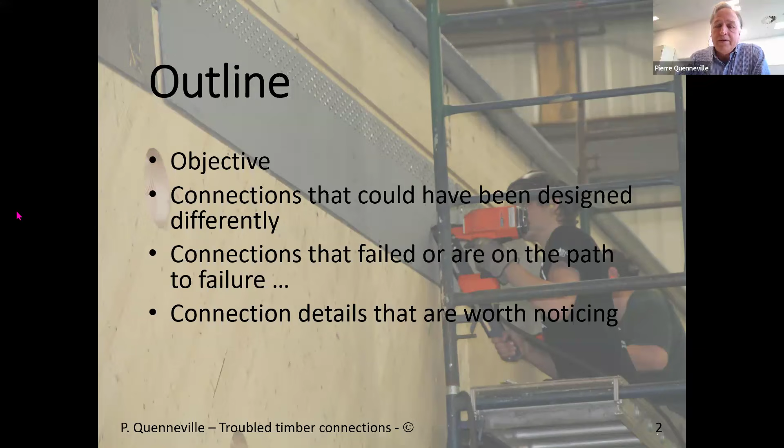But first, I just want to say that I don't want to pick on negative aspects of someone's design. I just want to highlight the fact that some of the details that I've been observing need to be considered, and hopefully in your future designs, there will be better outcomes.

So starting with connections that could have been designed differently. I'm starting with some of them where, when I saw this one, I said, wow, so many bolts, and it could have been done in a different way.

And then starting to look at this in more detail, there's a metal plate connecting this member to the column, and the height of this bolt group is definitely greater than anything that is allowed within codes if there's shrinkage.

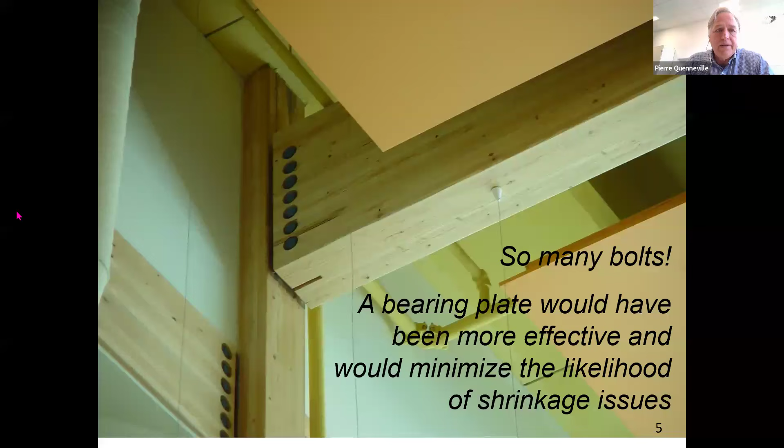So, in retrospect, you say the main issue with this one is in service. If there's shrinkage, there will be splitting in this connection, and any splitting would compromise the resistance of that joint if there's any actual load applied to this joint.

This one, nothing wrong in terms of resistance, but really, when I see this and I see the beauty of the wood, I say this could have been done in a different way.

So yeah, somebody made a killing in terms of supplying steel, but that's not what we want to see in a timber structure. But as I said, it works. So code-wise, it's okay.

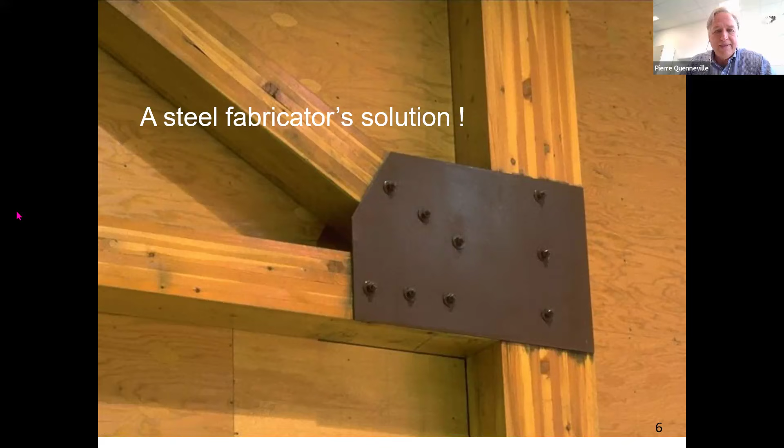This one's an interesting one. So it's a structure, a portal frame, with a moment connection between the column and the beam.

When you look at it closely, we see another case of steel plate restricting the shrinkage of the timber member under reducing moisture content. There's a steel insert into the glulam at the top and at the bottom, and then dowels that are inserted between the steel insert and the glulam.

You can see here the bolts connecting the steel insert to the plate, and another one at this portion. The steel insert and the fact that everything is connected to the steel, plus the addition of in-service dry conditions — we're talking about a heated inside environment — means the moisture content of that member can go as low as 5%.

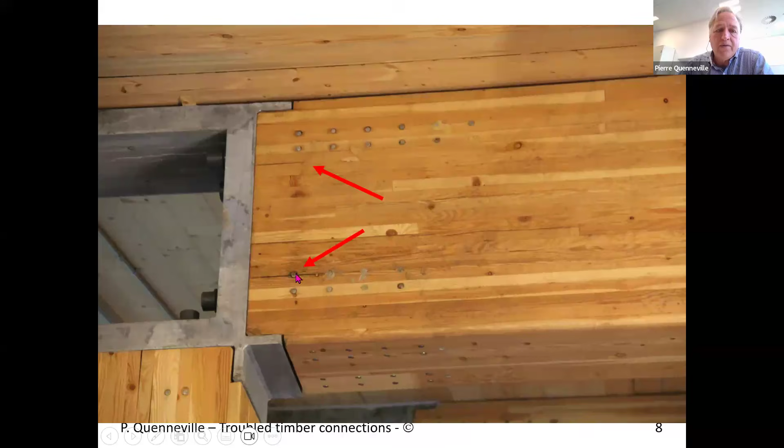So even though it's fabricated at 12 or fabricated at 8, the resulting moisture content will force shrinkage, and we're starting to have these shrinkage cracks. Now, there are lots of dowels in both orthogonal directions, so it may not be that much of an issue, but it's not as effective as what it was designed for from the start, specifically for this one.

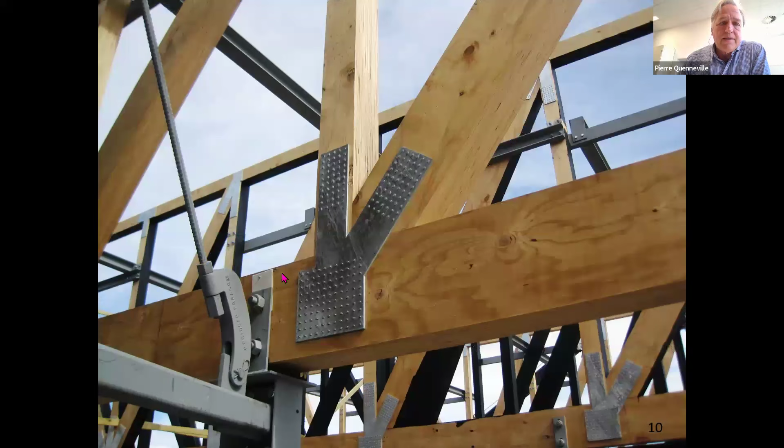Timber rivets, used a lot in North America, introduced lately in New Zealand. This is a photo of a truss where the rivets are utilized, consisting of a steel plate connecting different members, with the rivets inserted.

The requirement is that the flat side of the rivet is supposed to be installed parallel to the grain of the member. This way the fibers in the members are spread apart, and the gross area of the member is not compromised — there's no reduction, and the member retains its full tensile resistance.

Obviously, this has not necessarily been communicated efficiently everywhere. One can see that in this case, the rivets were installed at whatever orientation. And when I see this, well, the rivet did cut into the fibers — there's potential for actually splitting the member.

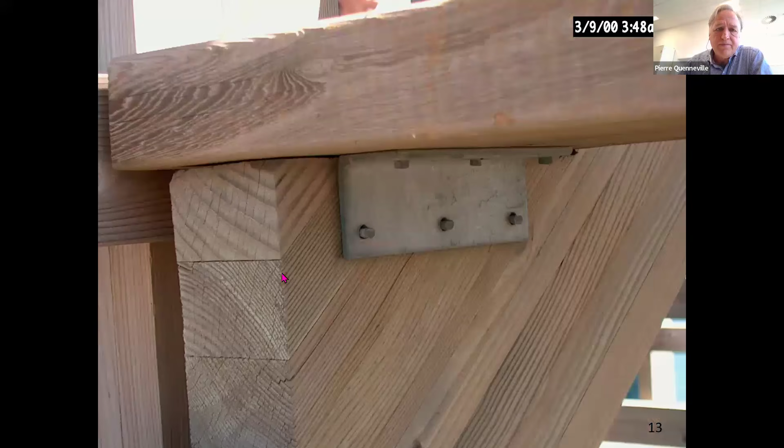In this case, there was enough wood above that the member resistance was not compromised. You get the same thing here, another location, same project. So definitely an issue with one of those installers who did not get the message — things that need to be passed on to make sure that your design is actually implemented the way you want it.

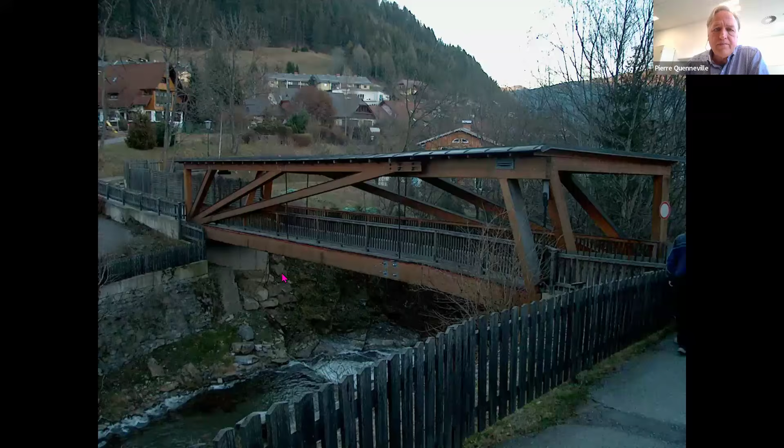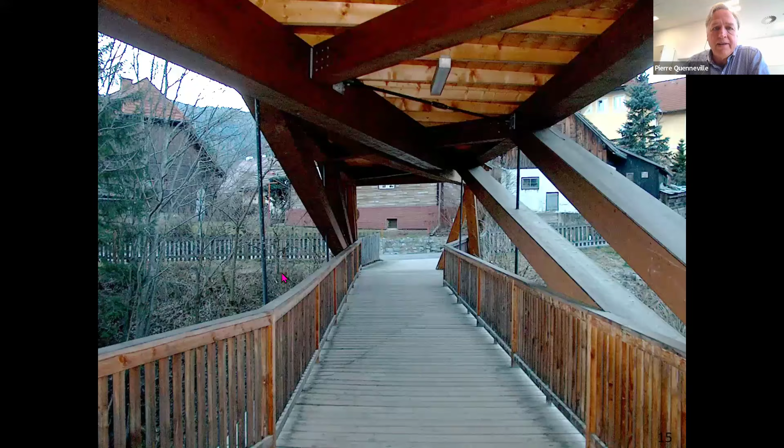A very nice pedestrian bridge in Europe. It has quite nice features, structurally speaking. When one looks at it, it's composed of two triangular segments, allowing some adjustment on site depending on the position of the foundation.

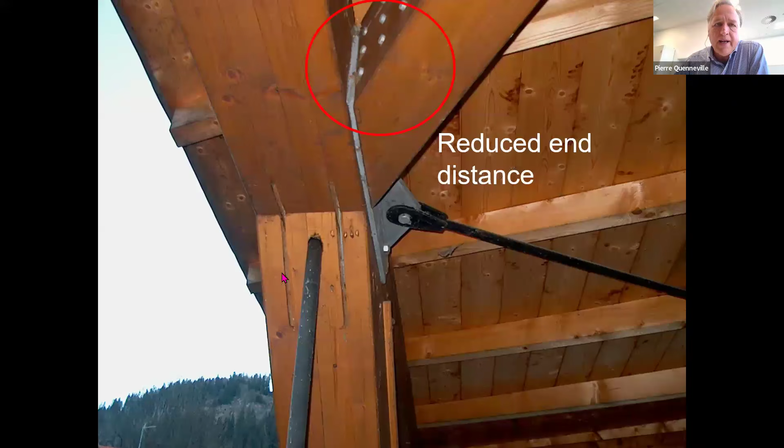The triangular sections are connected using steel weldment and dowels. When one looks at some of the connections, you see there's a steel plate, and one would guess there will be a steel plate along in the member — but it's not showing at the bottom, so that's a nice detail.

When one looks at those dowels, those last three dowels, the end distance makes this connection very susceptible to brittle failures. On the other side, the end distance is quite long, so it may not be an issue, but as it has been tested, this small end distance will create an issue for that connection.

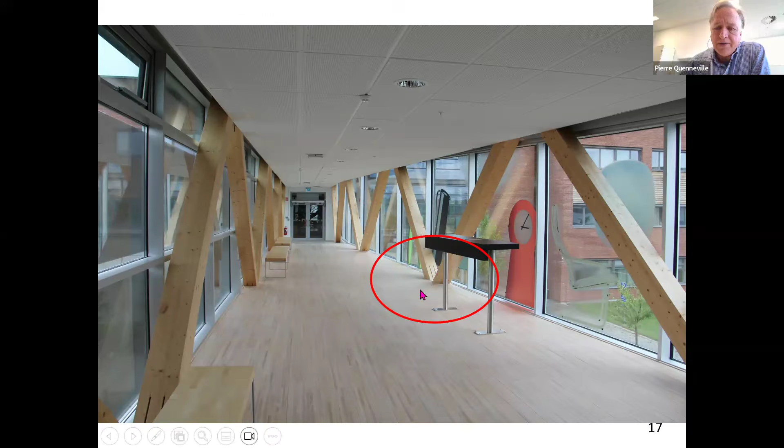On this footpath between two buildings, I want to highlight what I've observed in this connection. It's a connection with the members connected using two inserted steel plates — so what we have is two instances of wood, steel, wood connections.

What I observe is the positioning of the steel plate. Using the European yield model, the thickness of the side member governs for embedment. In the middle part here, if I divide it in two and use the same thickness on the outside, there's a portion left out and not utilized. So either this was kept for fire protection, or the positioning of the steel plate could have been more on the outside to utilize that portion of the member.

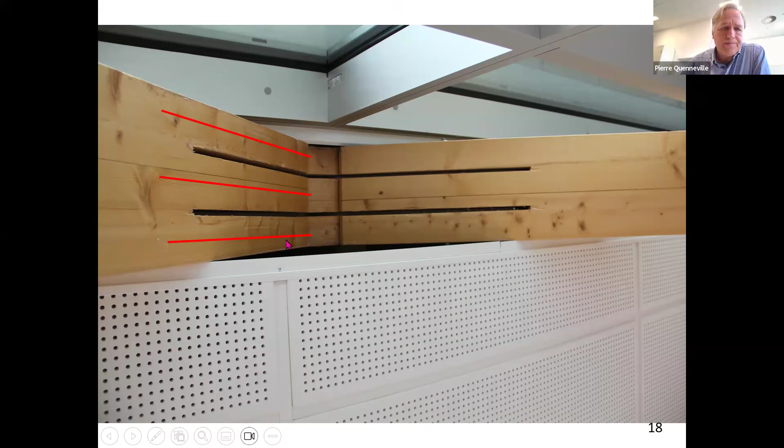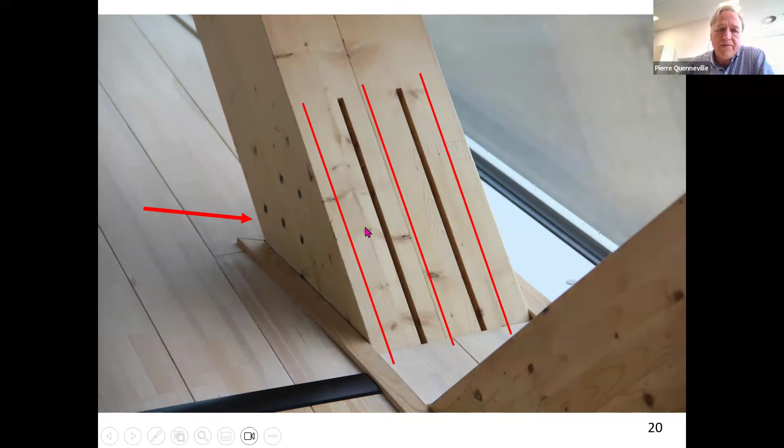There's some places where these dowel holes are filled, but not everywhere. So either this outside portion was meant to provide fire coverage and the dowel holes were just not filled, or it was not meant this way, and the position of the steel plate could be more on the outside to utilize the full volume of the member.

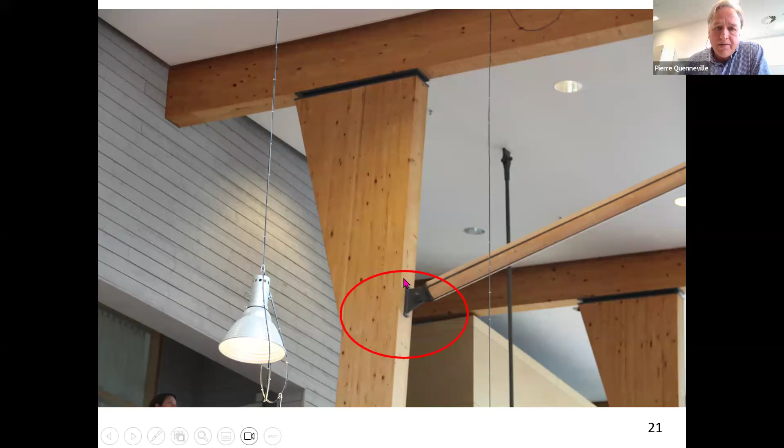Another connection where the strut is connected to the vertical member. We have a steel plate, and more than likely the load here is in compression, so that steel plate is doing most of the work. But when we look in more detail, we have dowels that are also positioning the inserted steel plate inside the member. And we have again a moisture issue with shrinkage and the development of

tension perpendicular-to-grain splits in the connection. Hopefully it's not a connection that will be subjected to tension, so it's not that critical. But if there's tension force on that connection, then this is compromised. So potentially steel or screws could have done the same thing without the problem of splitting in the wood member.

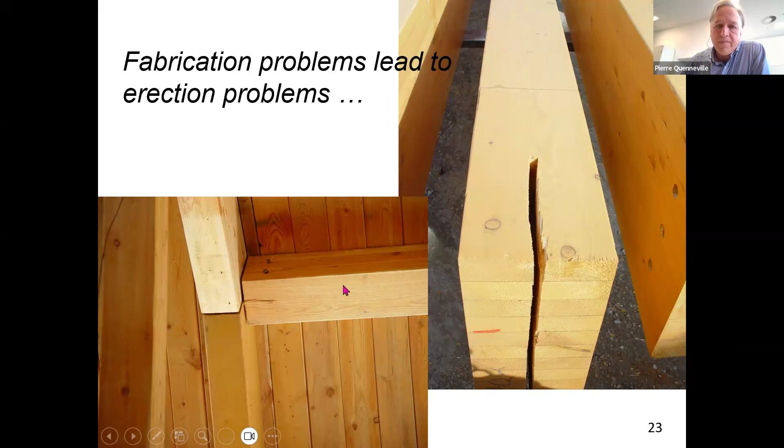This one was for a project where the visual aspect of the connection was quite high in terms of demand, so everything was done with the requirement that the steel did not be apparent. It was done very nicely, a lot of prefabrication, but in this case some mishap during erection. It could have been corrected. It's unfortunate it wasn't picked up or corrected by the erector. It was picked up by the inspecting engineer afterwards.

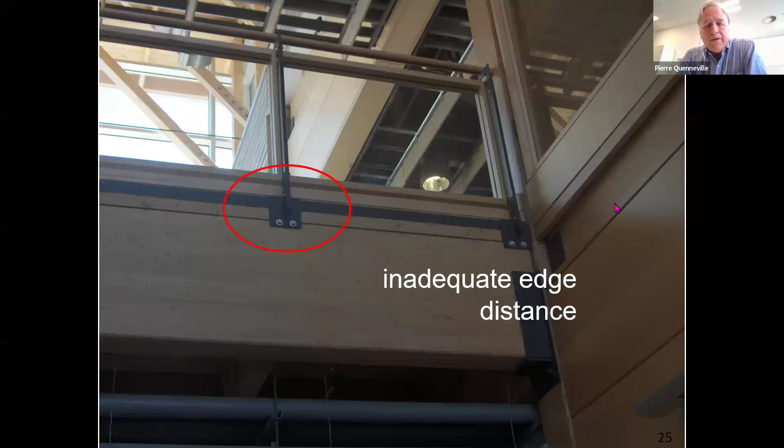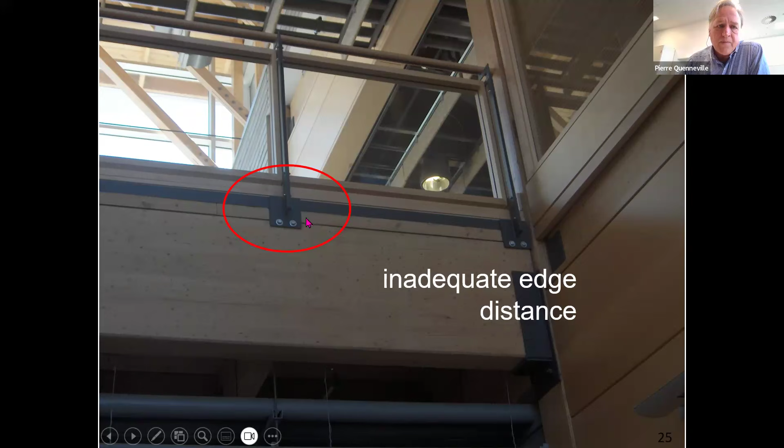This one is a design issue. Another older structure where the edge distance of the fastener was not a good one. Hopefully that was picked up during the project, and connectors were installed to fix the flooring member to the beam, to make sure that this member on top would stay in contact with the beam. This is a detail that is reproduced throughout that building, and unfortunately it wasn't picked up.

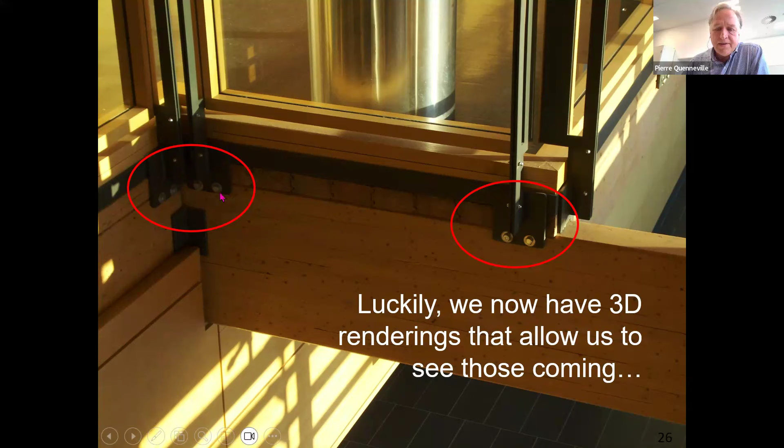Nowadays we have 3D renderings that allow us to see these things coming, so we can avoid these details. As I said, perhaps it's not a structural issue right now. If there's vertical fasteners that are keeping the members above, then all the resistance is still effective.

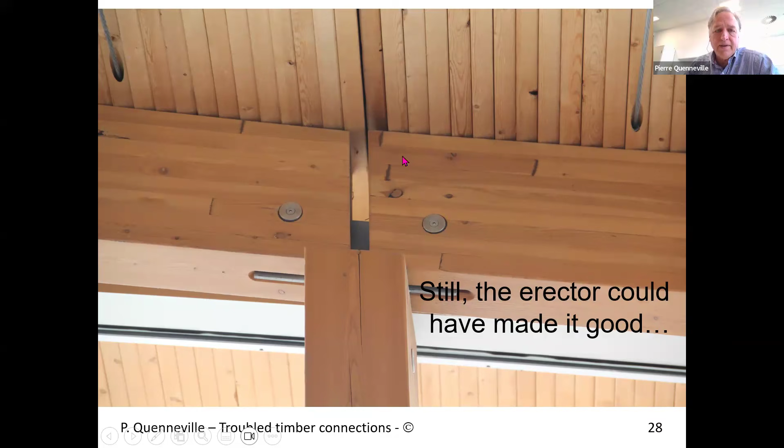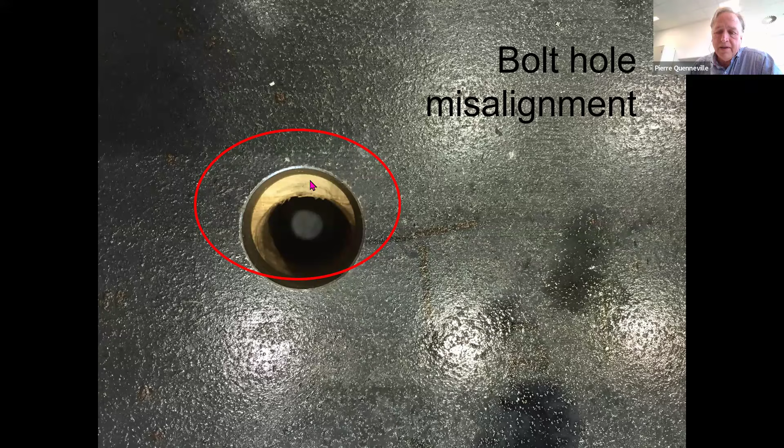Bolt hole misalignment. We are working to very tight tolerances, so timber manufacturers right now are working to plus or minus 1 millimeter. It's very, very tight. Hopefully these tolerances are communicated to the steel weldment fabricators. These things tend to happen before. There's potential for adjustment on site, but any enlarged timber hole will compromise the resistance of the fastener.

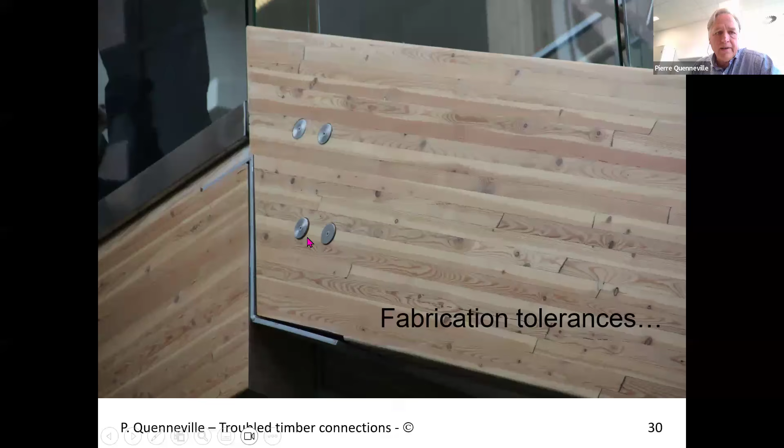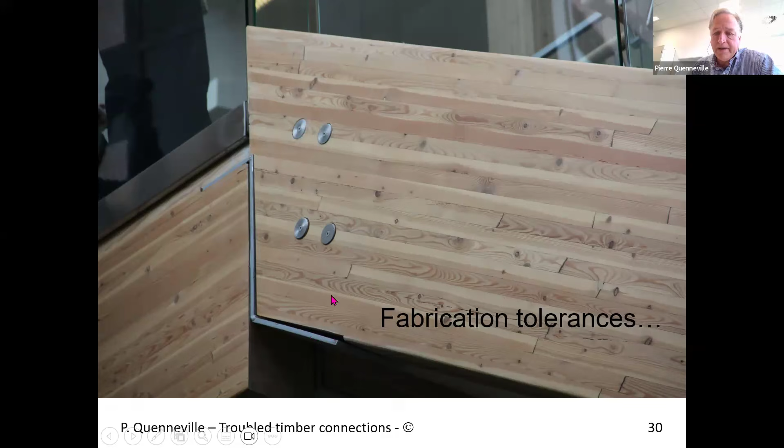Another noticed fabrication tolerance issue. The steel plate was meant to bear, probably not. In fact, you have dowels in here, so there's probably a steel plate that is inserted in the middle of the member, but it certainly doesn't look good. If I'd be in this case, I would have asked for holes to be drilled in the steel plate and screws inserted to keep the plate in place, in contact with the wood.

Moving on to connections that failed. First point that I want to show is where the connection failed because of inadequate resistance. We've probably all seen this one - that's a Velodrome in Scandinavia. The roof structure was supported by timber trusses, and during the night, a truss connection failed. The commission of inquiry was set up, and a net tension resistance failure was concluded.

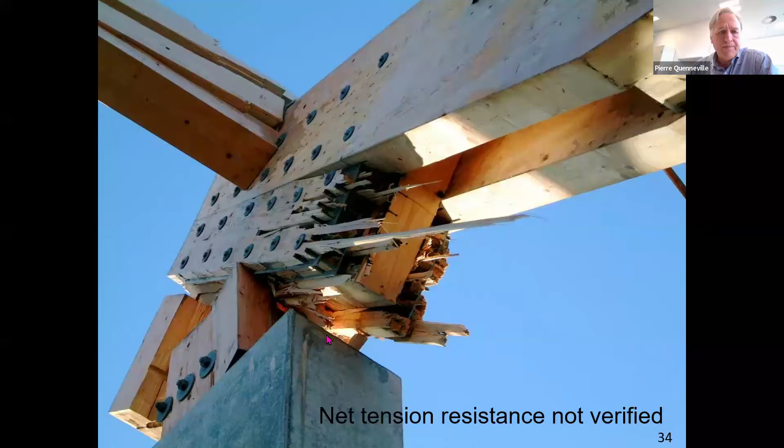Unfortunately, that resistance was not verified during design, and it ended up this way. Luckily, no one perished. Nails or rivets will allow some - so if you're using nails or rivets, these are fasteners that do not reduce your gross area. If you design your member cross section, then you're okay at your connection. But with any other fastener, there will be some reduction in your gross area, so you need to allow for some extra member size, because you will need to connect at the end, and you will be removing some material.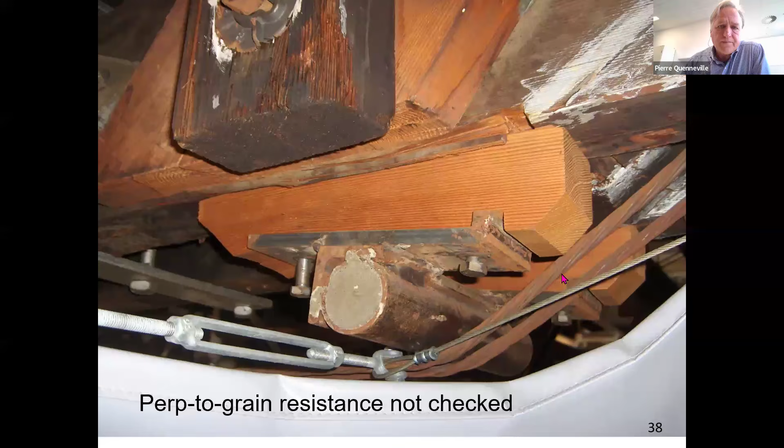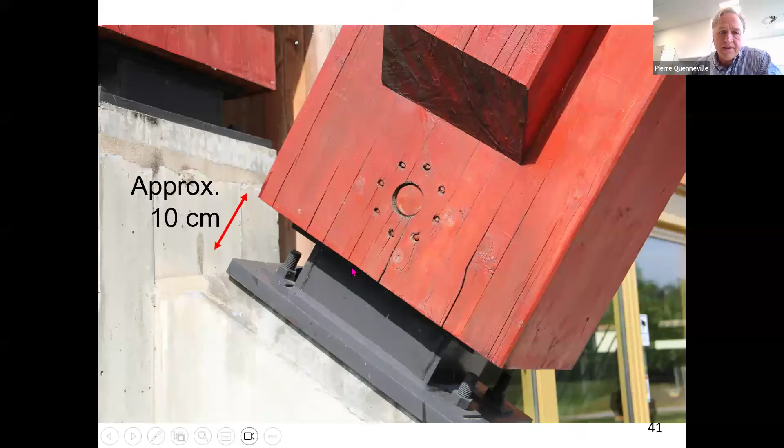But at the other connection, there was definitely something happening. So if we go back here, we have a bearing plate underneath, a steel plate inside, and a pin and some dowels. Probably those are just to keep the weldment in place. The main load transfer is through this steel plate underneath.

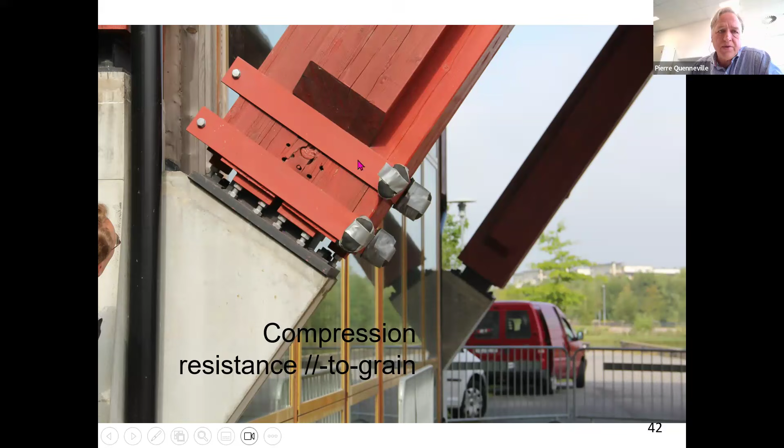And when one looks at it, some issues with that steel plate. These little added bearing plates were put in afterwards. The strut end was strapped together to make sure that there was no splitting in the end member. But when we look further, we see that the steel plate has embedded into the end of the member, compromising the resistance.

So inadequate bearing parallel to grain, probably under wet conditions. I'm not sure exactly if that was checked, but the remedial measure would call for probably a higher or larger bearing area.

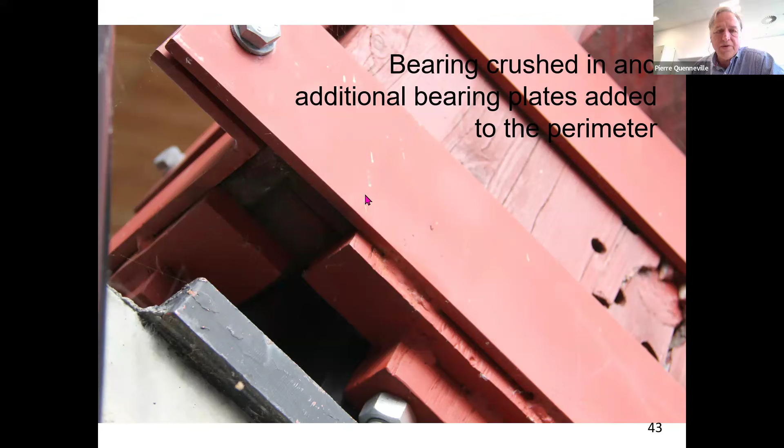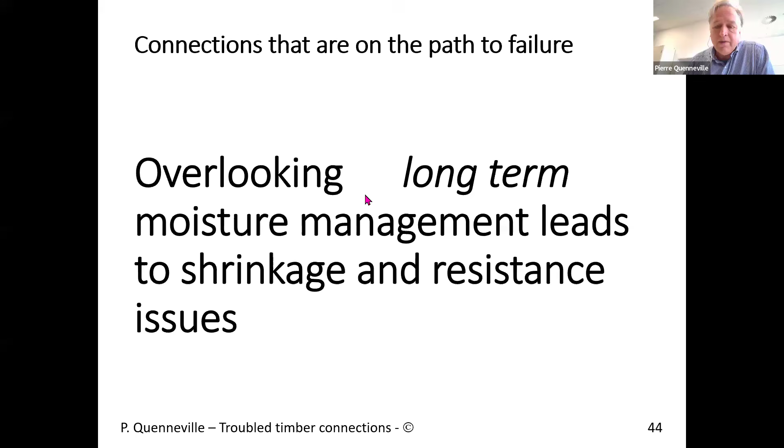So moving from connections that fail to connections that are on the path to failure. At this point, there's been a lot of talk about moisture management, but I want to make the point of long-term moisture management, so in-service moisture management. This will lead to shrinkage, normally in enclosed structures, enclosed buildings. And these shrinkage issues will lead to resistance problems.

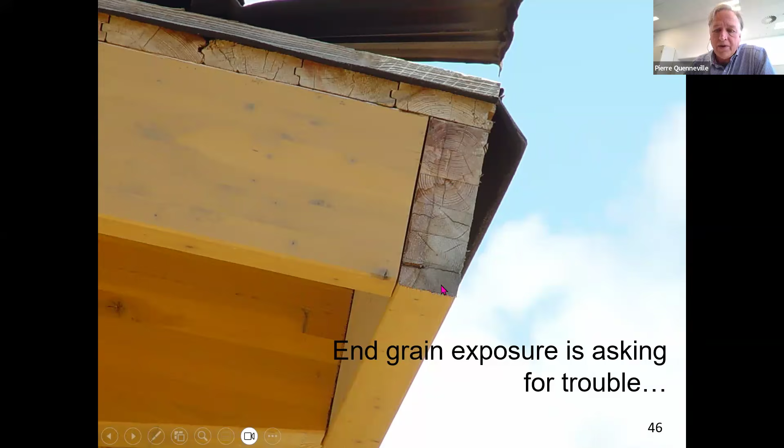And then there's some older buildings in Europe where this has been experienced and then corrected over time. Another point, another issue in this case where the end grain is exposed.

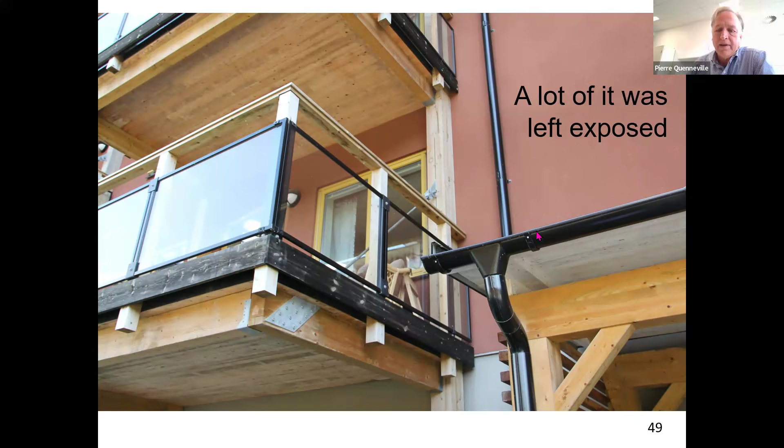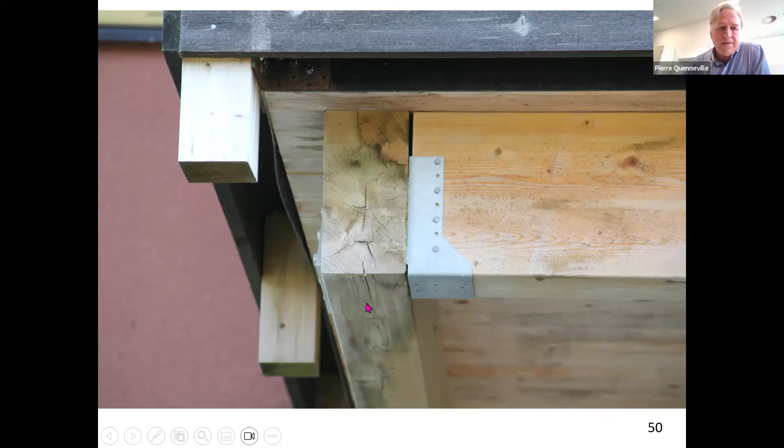So when you look closely at the balconies, look at the fact that the end grain again was exposed, and one can see the starting issue of some problem. This will lead to degradation of the resistance. And this is seen throughout the building.

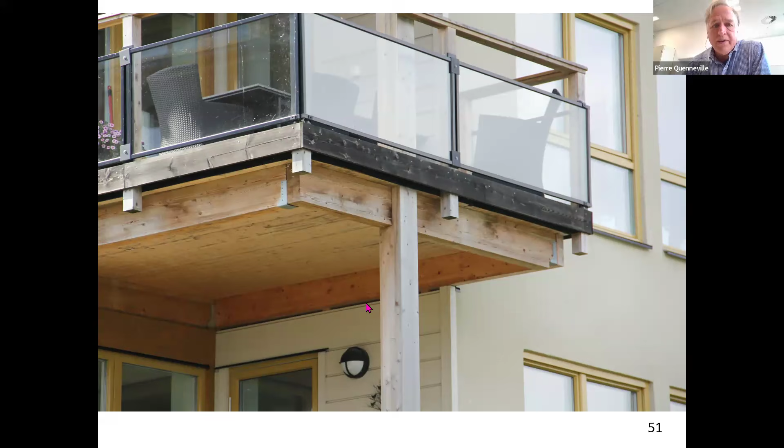And that's just because we wanted at that time to see timber. We were happy to see timber and to celebrate the fact that multi-story timber buildings were being done.

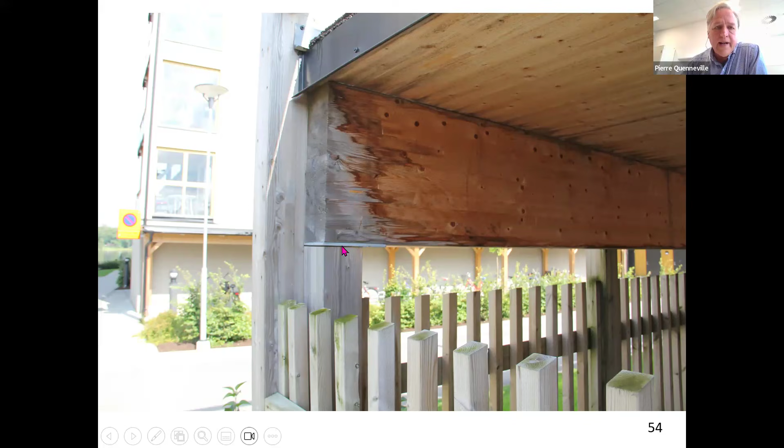So we need to take care of the end grain and make sure that we protect the members so that we have lasting connections. Some details were added after these water ingress issues were noted. Hopefully that will change with time, but we'll see how it goes.

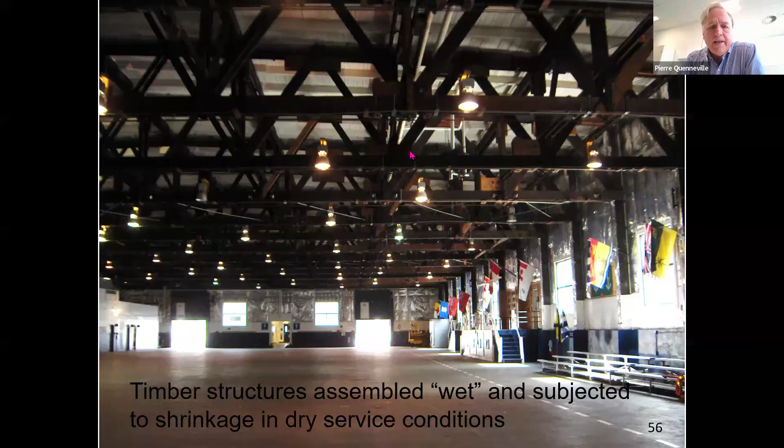When I started my career in the mid-1980s, I was asked to look at a lot of these old timber trusses that were built in the 1940s. Because of the timing that these were done, a lot of them were assembled with wet timbers and used over the years in Canadian climate. So enclosed, heated structures, and the moisture content went from probably over 20% down to 5 or 8%. That's sometimes when we measured.

So very significant shrinkage issues in these truss members, and it led to a multitude of issues. A lot of them were just a lack of maintenance following the shrinkage, so they were all connected with split rings and shear plates, and it's just a matter of making sure that there's a plan to go and retighten those threaded rods or bolts to make sure that the members are actually in contact, to make sure that those fasteners are actually working the way they were meant to work.

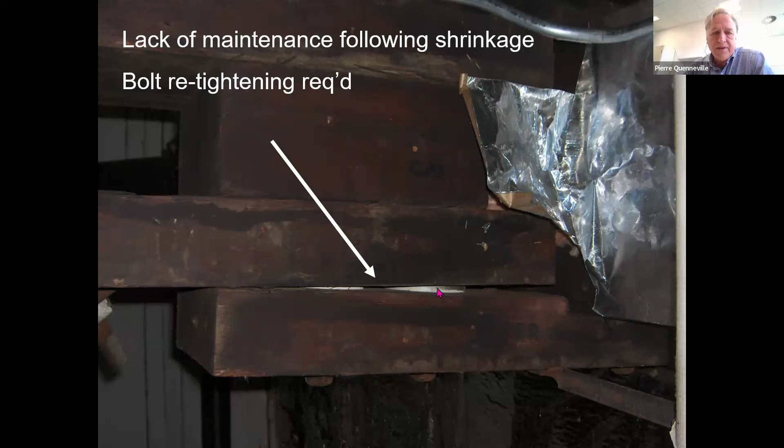Now, this may not always be possible, to go and have access to bolts and fasteners and retighten them, so one has to plan for this. There's extensive amounts of splitting in the members, and at that time we had to install anti-check bolts and clamps just to make sure that the members retain their resistance at the connections.

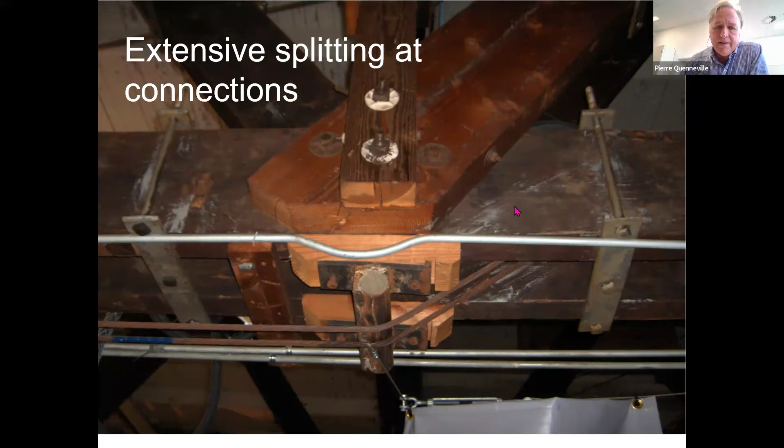In this case, this is the supporting beam, and this is the beam being supported. There are steel plates inside the members, and dowels are inserted to connect the glulam to the steel plate. The steel plate extends to the other side, where there are dowels again.

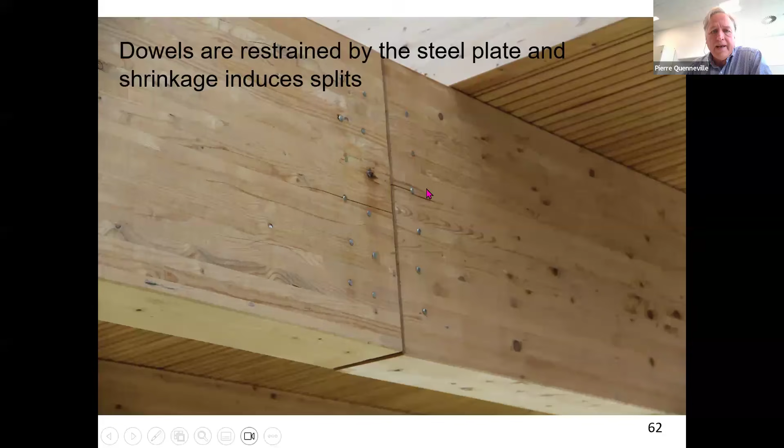The problem is that we have one single steel plate from top to bottom. If there's any shrinkage in that member, the dowels keep the top and bottom of the steel from shrinking and reducing in cross section, so we're starting to see splits along the member. If you look at other places in that building, there were multiple locations where the dowels had split.

May not be catastrophic, but in this case an expert opinion was called in after a year that the building was commissioned. This looked a lot more serious. People wanted to know if this was an issue—it just doesn't look good.

There are ways to go around this. There's a maximum height, maximum vertical distance, or maximum distance across the grain where dowels should be installed to allow for shrinkage if it's to occur. It's a matter of fabrication, erection, moisture content, and final in-service moisture content of the member—all these things need to be taken into account.

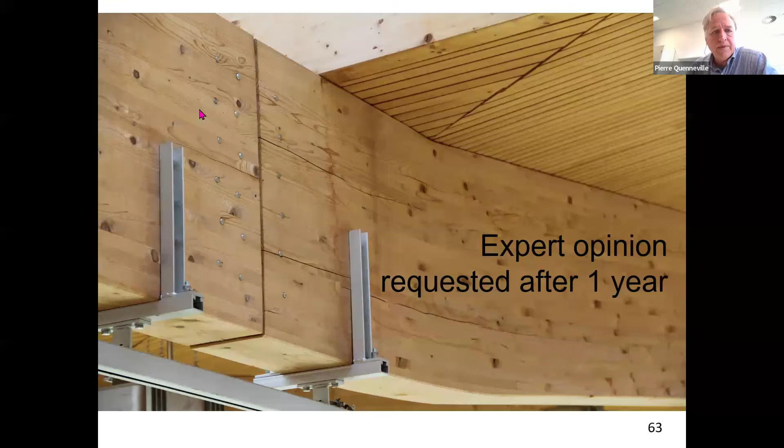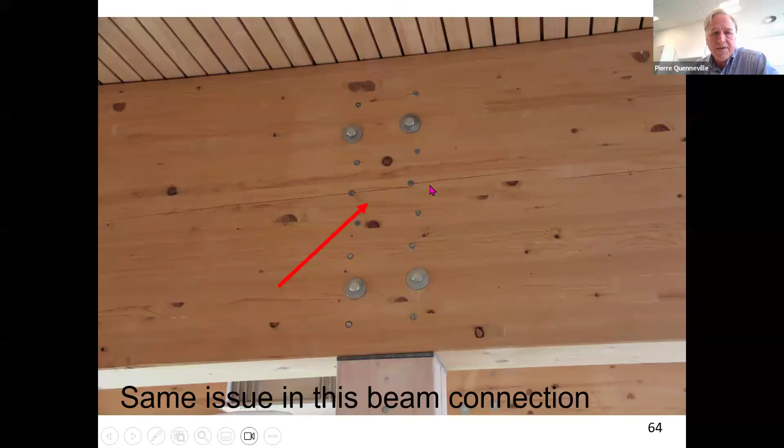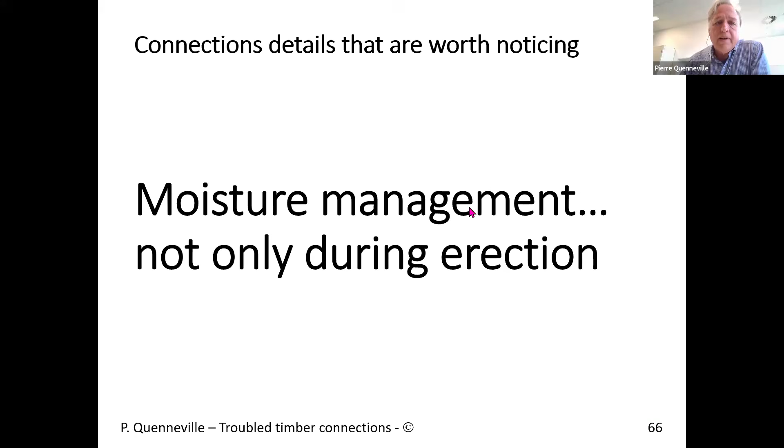Moving on to the last portion, connection details worth noticing. First is moisture management—not only during erection, but planning for what's going to happen afterwards. I'm not sure we're there yet in New Zealand in terms of moisture management during erection.

A lot of other places do protect the members. In this case, members that will be left exposed are heavily protected during erection, while part of the structural members will not be exposed. So moisture management in this case is not that much of an issue.

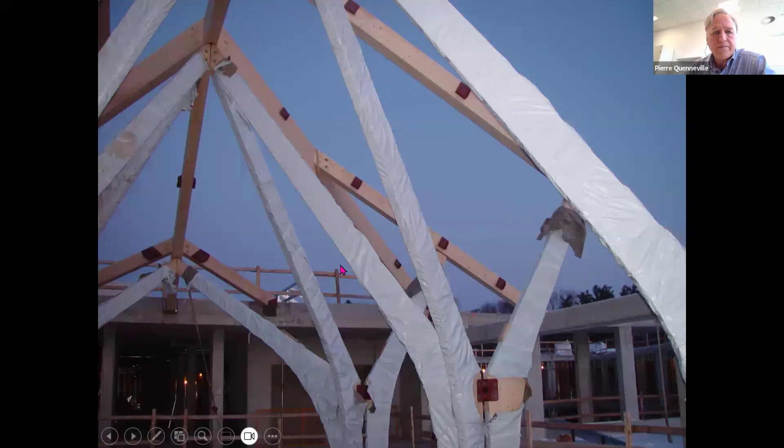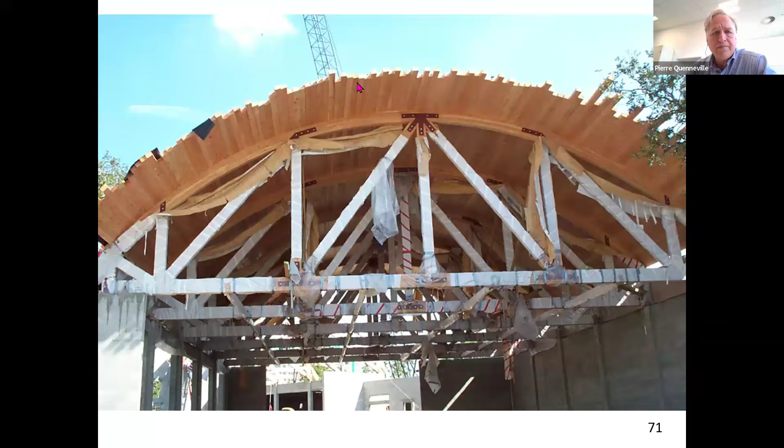This is another case of this—again, a portion of the wrapping has been removed to put in the connections to connect the members. And another example where the wrapping has been removed where the top surface has been connected to the top chord.

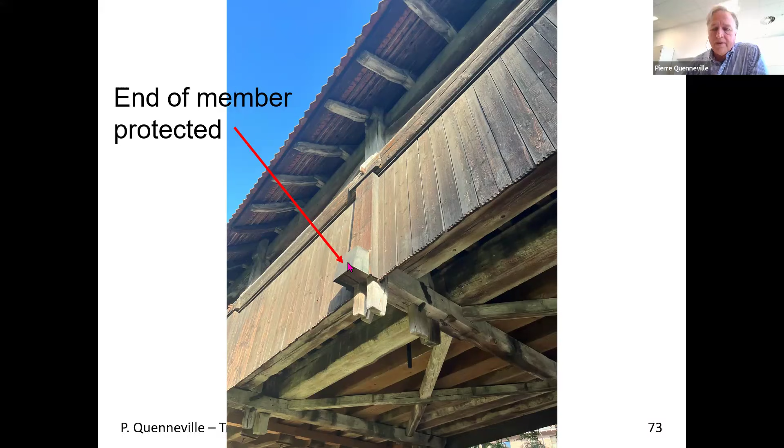Many examples in older buildings, such as a covered bridge in Switzerland—they're renowned for those, some of them 500 years old. When we talk about end grain protection, we mean protecting the end of the member. There's an added piece inserted at the end of the member to make sure the wood end grain doesn't suck up the moisture or rain that comes onto it.

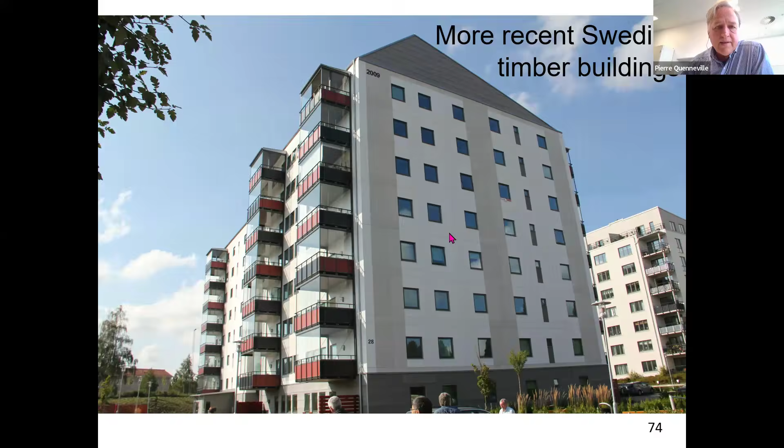You recall the Swedish set of apartments built in the early 2000s in the same area. More recent timber buildings were built with more or less the same configuration and same balconies, but in this case the timber is not as exposed—there was definitely learning from the first set of buildings. Looking closely, everything was covered; these are still timber balconies, but all of it is protected, with only the underside of the balcony platform left exposed.

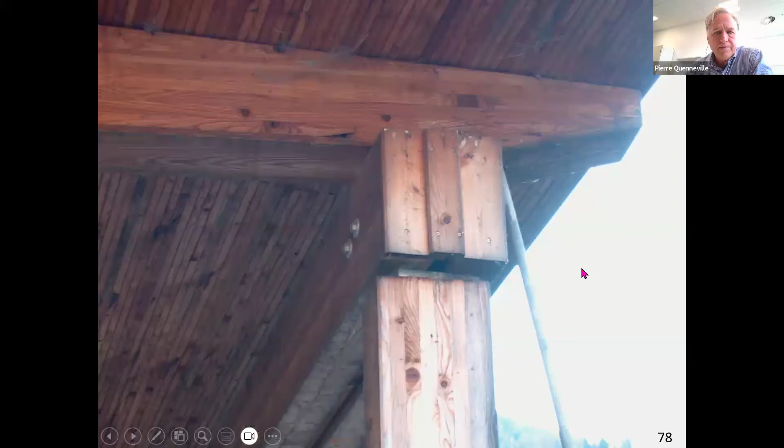End grain protection—just adding end timber pieces to keep the visual aspect of timber, but we don't actually see any end grain in this member.

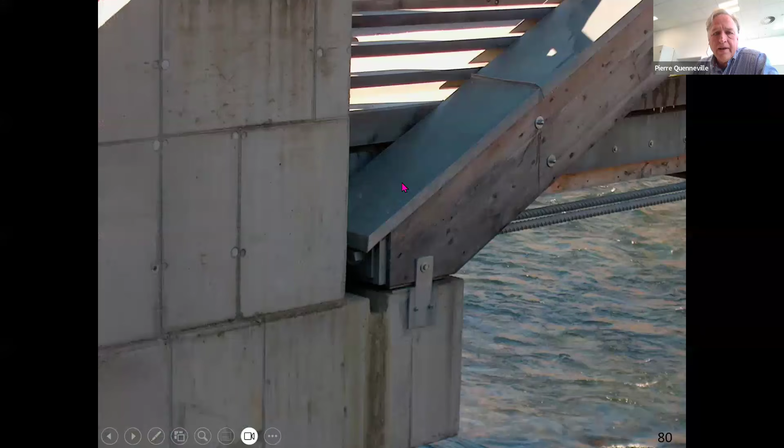Timber bridges, so timber arch, glulam arch, and glulam members, but all of it has been protected. The top surface has been protected, and the connections have been protected as well, so there's no potential for accumulation of moisture on top of the member. The side member will get moisture, but it will drip and will not accumulate within the member.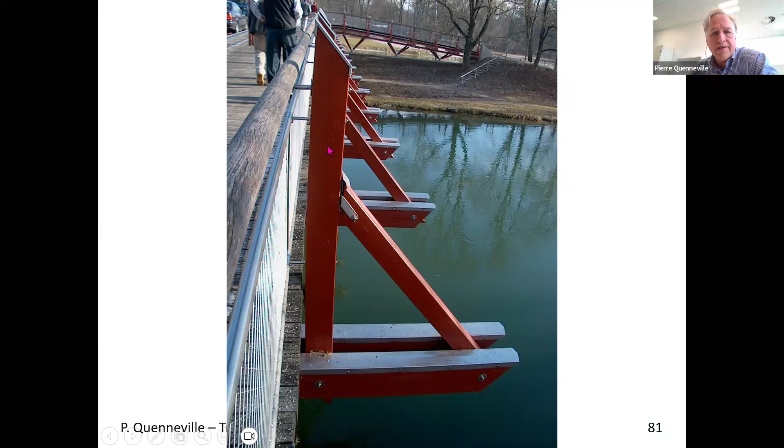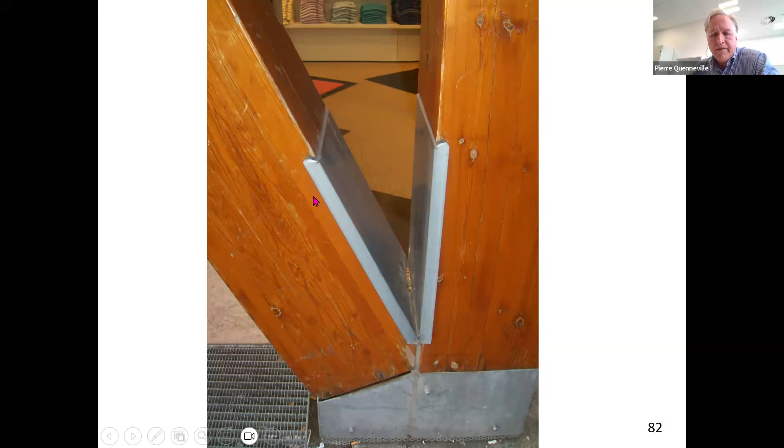Other examples, so lots of moisture management in this case. And another example where exposed glulam members outside are being protected, and this is the detail of the sheet metal into the glulam.

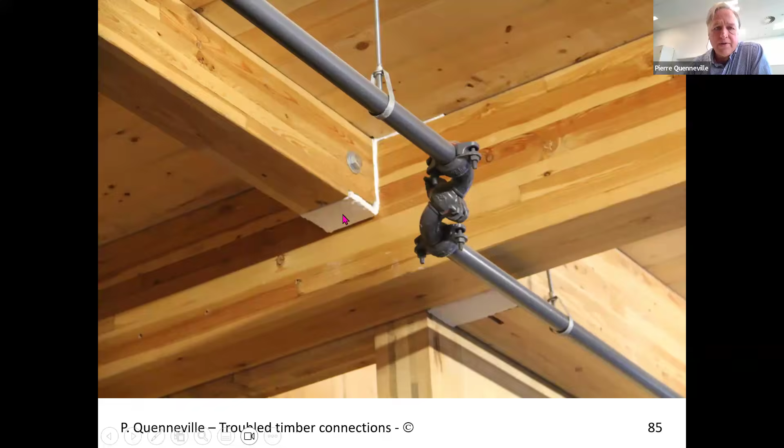One avenue is to conceal any of the steel bracketry, and this is what was done in that building. So all the steel connectors were eventually covered, those dowel holes were plugged, and at the end you'd get something where nothing is shown. It takes a bit more detailing, but it ensures that during fire, your steel brackets are not sucking up the high temperatures, and then your connections are not compromised.

Some examples of redundancy, so a nice designing approach in some cases. Football or soccer stadium in Eastern Canada. In this case, it's 3-hinged arches, so hinge at the bottom, hinge at the top, and then hinge at the other end.

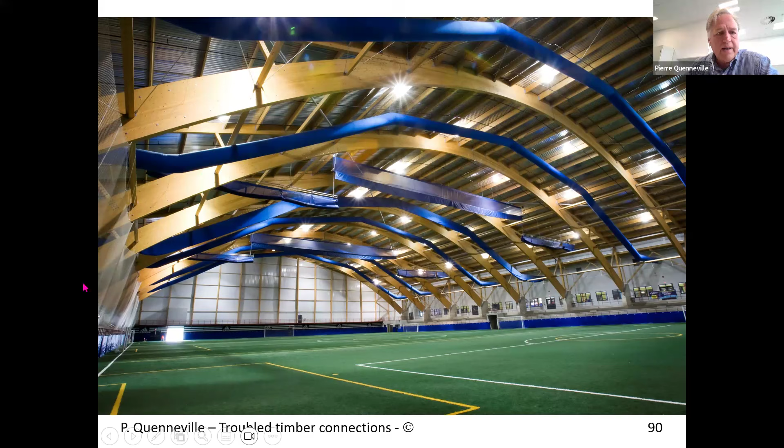Obviously nice connections, and one can see that the arch member is made out of 2 glulam laminations. The steel bracketry consists of steel plates inside, and there's the required number of fasteners to keep these members working together throughout the length. But what I want to show is this connection here.

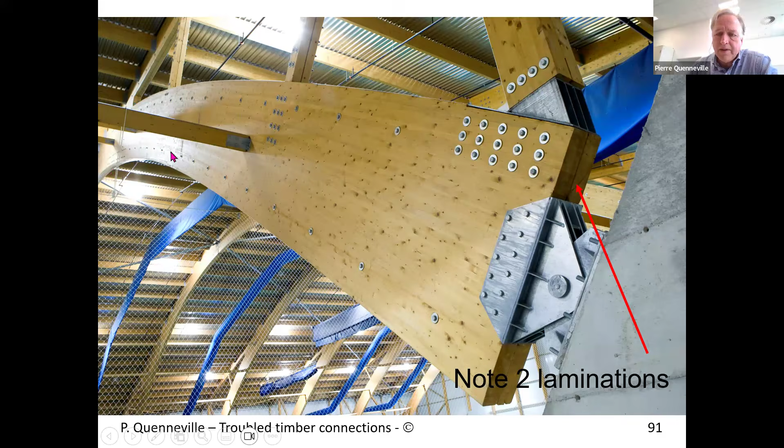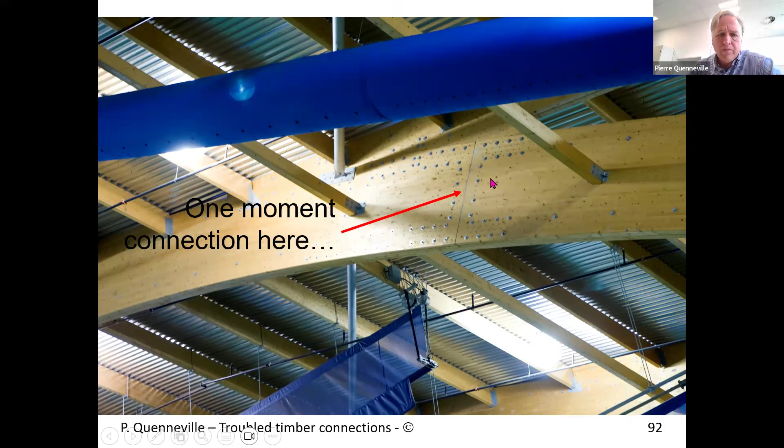So we have a moment connection. The arch was made out of different segments, so we have one moment connection here: a steel plate that connects the bottom, and another steel plate that connects the top portion of the arch member, and probably another steel plate that connects the web. But what one doesn't see or appreciate here is that on the other lamination, the other connection is further down.

So it's not at the same location that we have the moment connections. So we have redundancy in the connection because the connections in the 2 different laminations are not adjacent. This ensures that we have some redundancy in the connection area for the arch member.

Same principle in another building. In this building, it's more or less a flat roof system. In this case, the main structural system consists of beams spaced, so two laminations in the beam. The column is made out of 3 members. The 2 outside members are supporting the beam in bearing, and then the middle portion is continuing throughout and ensuring the lateral stability of the beam system.

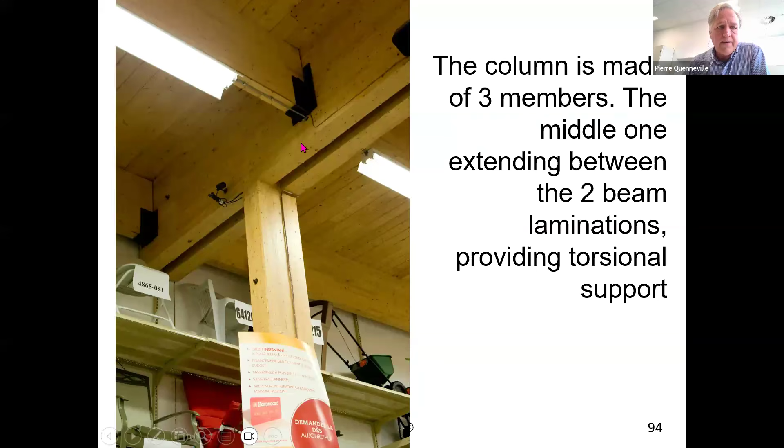But what was also very interesting is that in this system, we have a beam system. This beam lamination is simply supported from this end and this one, and then has an overhang supporting this other one. So a Gerber system, and we have a connection between the supported beam and the supporting beam. And in the other lamination, the other connection is further down on the other side.

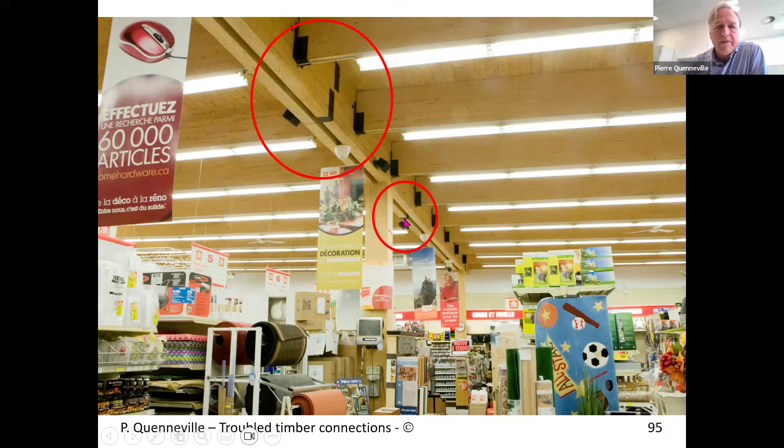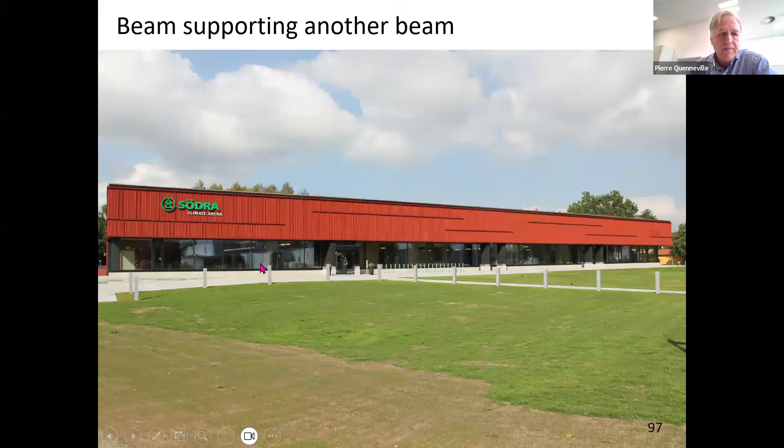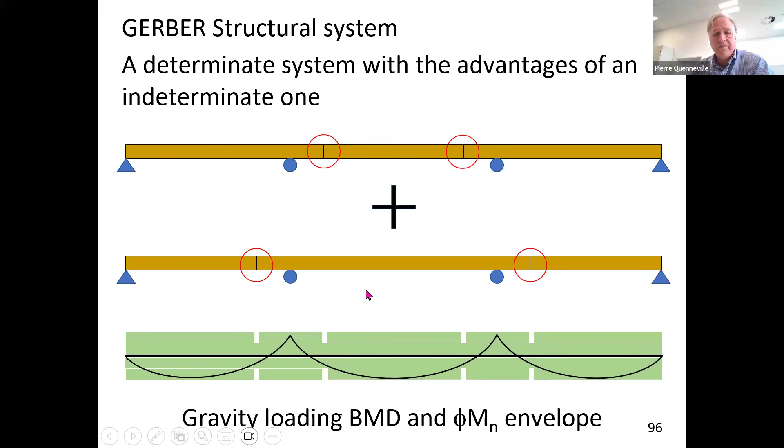This is a case where we have a beam supporting another beam. So in this case, another case where this portion is being supported by the one on the left. So another case where the supporting system is this simply supported beam, and the one on the right is being supported.

Similar to the other gymnasium example I showed you before, but in this case, two laminations, and we have a support at the bottom and a support at the top of the supporting beam. So bearing perpendicular to grain at the bottom, given it's the same species of wood, same detail at the other end, and the steel plate is just in between the two laminations. This is what we have, a connection at the top. So very simple, very effective, and no problems with shrinkage of the beam.

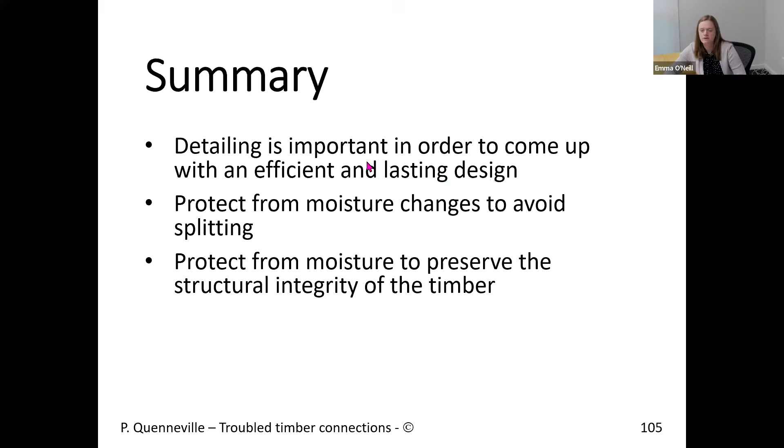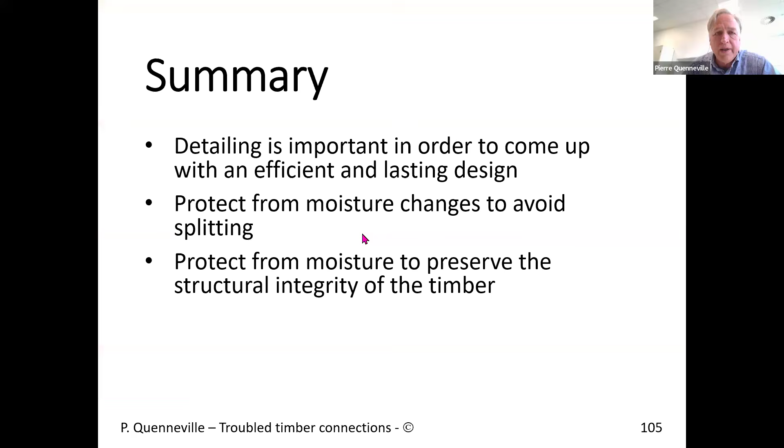Now, these, from what I could see, are probably 1/4 inch, 6 millimeter in diameter. They were really small in terms of, when you look at them, not very big, in comparison to the other example in the gym, where the dowels were in the range of 14 to 16 millimeter, and quite stiff. But in terms of these, yeah, they do pose the risk, but they don't seem to be that big.